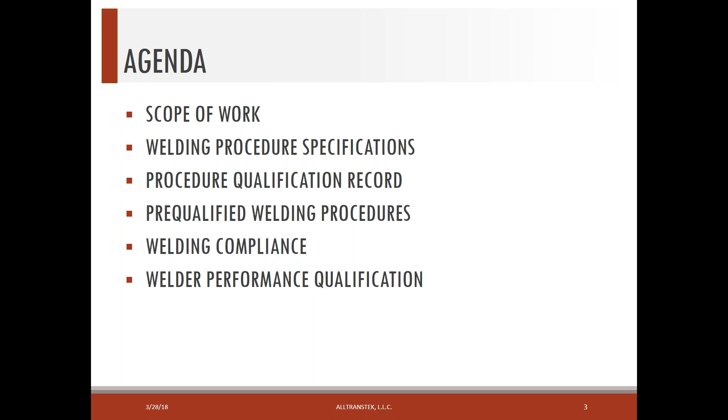So I'm going to hand it over to Mike. He's going to go through the scope of work and welding procedure section.

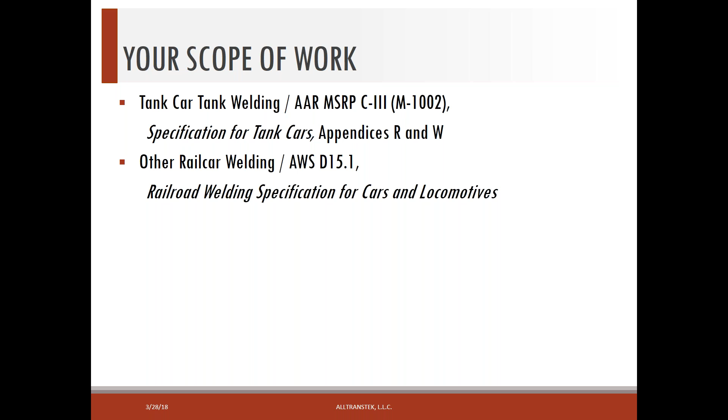Now some examples in the next few slides show welds covered under these different welding specifications. Here we see a side sheet on a hopper car, and that particular fillet weld would be covered by AWS D15.1 specification.

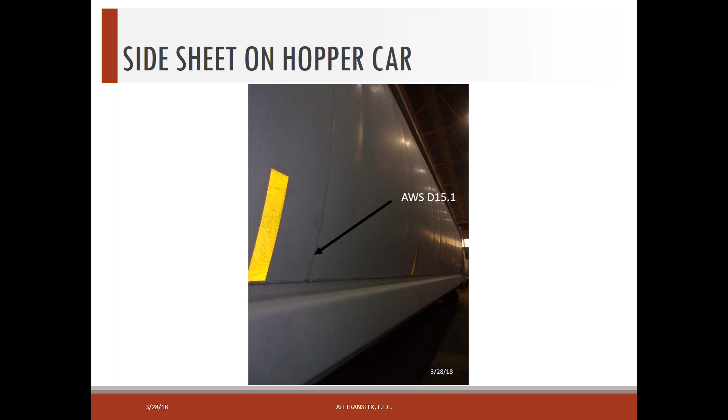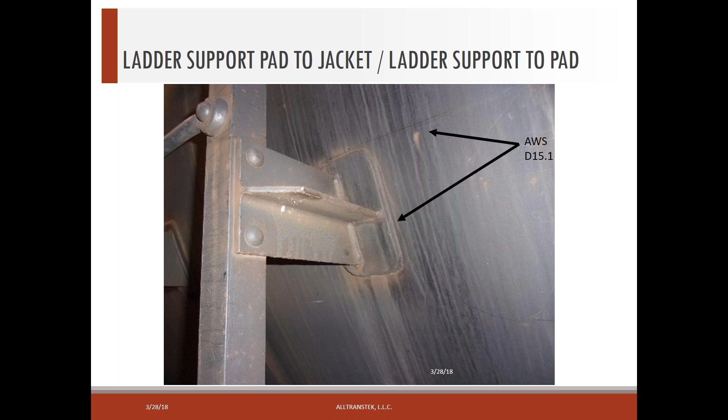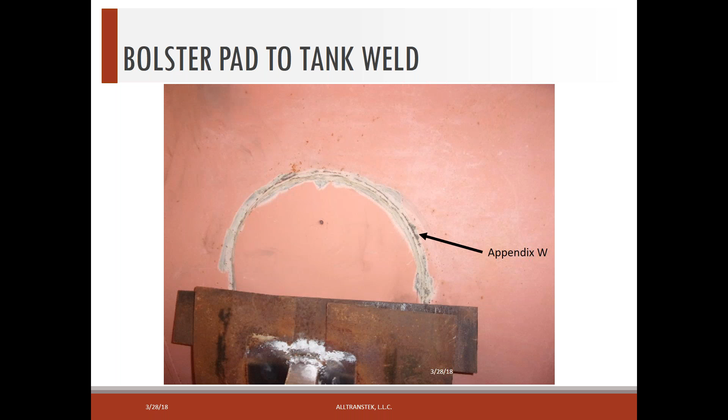This is a bolster pad to a tank. Now we're welding on the tank car tank proper, so we switch to a different welding specification—that fillet weld would be covered by Appendix W. Here we have two examples of welds of bottom reinforcing pad to the tank, and that fillet weld would be governed by Appendix W.

Then we have a portion of a draft sill transition pad welded to the reinforcing pad itself. Because it's welded not to the tank, but to the reinforcing pad, that particular weld would be covered by AWS D15.1.

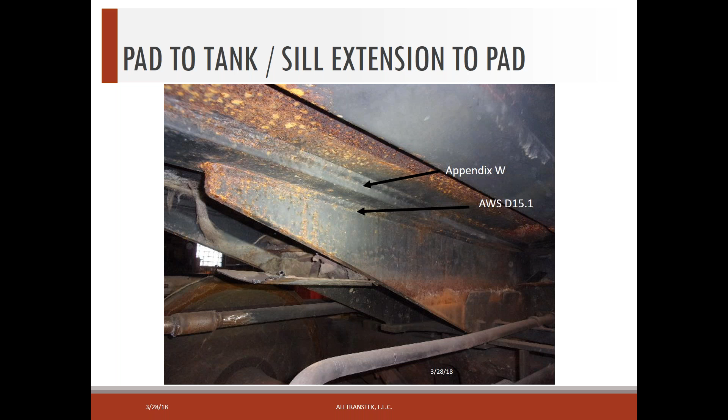Here we have a bottom valve on the tank car, and we see fillet welds there—it could be groove welds too. Groove welds and fillet welds on the steam jacket, again covered by AWS D15.1 because it's not part of the tank car tank.

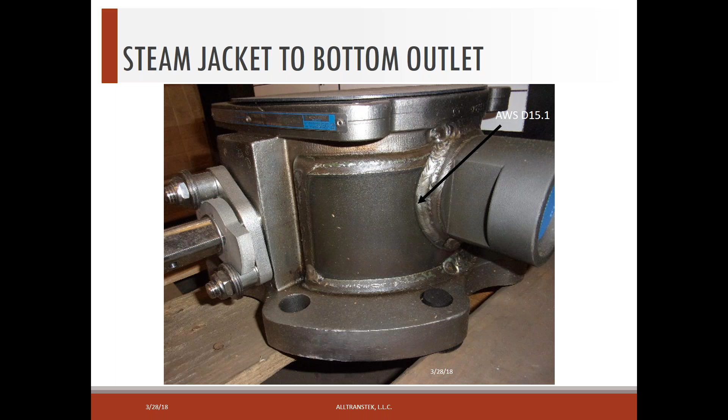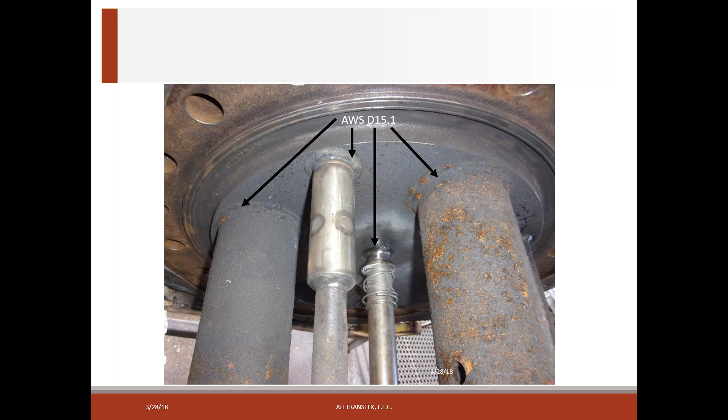Here we have a head brace reinforcing pad and the head brace itself. Because the head brace reinforcing pad is welded directly to the tank car tank, that weld is governed by Appendix W. The head brace itself, welded to the draft sill and to the reinforcing pad, since those members are not part of the tank car tank, those welds will be governed by AWS D15.1.

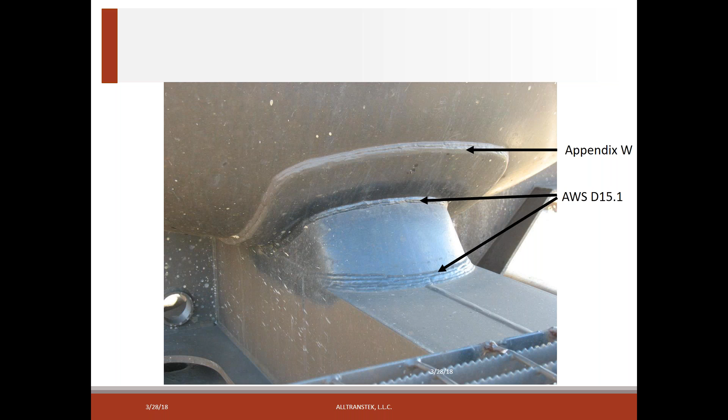Example of a flued manway. This will be a recent change here: any butt joint or any weld joint on the nozzle itself will be governed by Appendix W.

Part of the reason for that is the federal government and the Tank Car Committee have determined that because AWS D15.1 is not currently directly incorporated by reference into the federal regulations, the tank car nozzle and nozzle-to-flange welds will have to be covered by Appendix W.

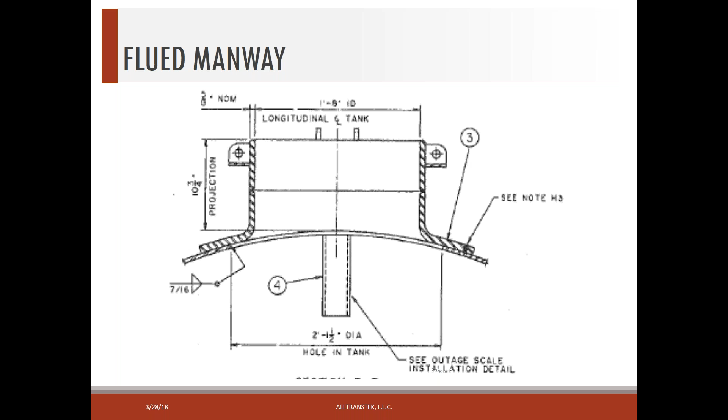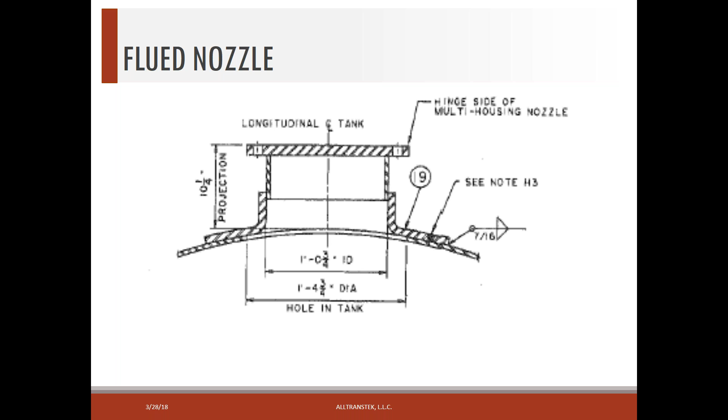The flued nozzle—instead of a groove weld here, we have a fillet weld where the nozzle is fillet welded to the flue, and probably a fillet weld where the nozzle is welded to the flange. Those welds will also be covered by Appendix W. And of course, the inserted manway, which is the groove weld into the tank shell, has always been covered by Appendix W—the nozzle to tank shell weld.

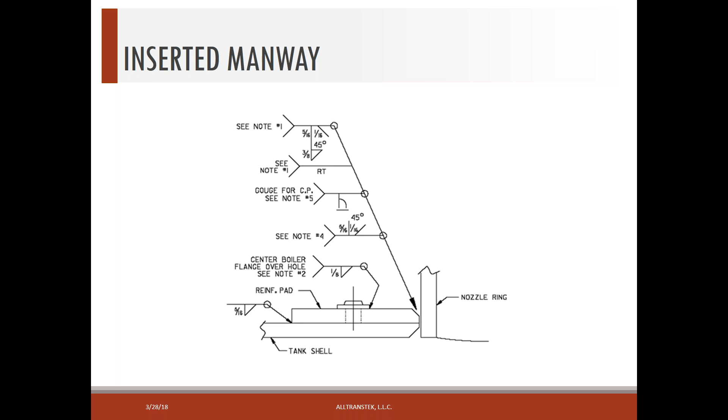Okay, again, one of the things that we have to identify under your scope of work is what material will be welded. Will it be carbon steel? Will it be stainless steel? Will it be aluminum? Of course, we could have castings, AAR M201, various grades of castings, which bottom outlet saddles and a lot of the running parts of a truck are made out of. And then, of course, the ASTM CF8M or CF3M, which is stainless steel castings. The point here, we have to clearly identify what materials are being used.

And how can we do that? Some of these materials will be identified through ASTM standards. There's Appendix M in the C3 AAR specification as a listing of materials for both tank proper, and then for other items as nozzles and flanges, and there's a pretty comprehensive list in Appendix M.

There's also a document put out by AWS. It's called the base metal grouping. The number is B2.1, and there are a whole host of materials identified: aluminum, stainless steel, carbon steel, and they're identified by M numbers and group numbers.

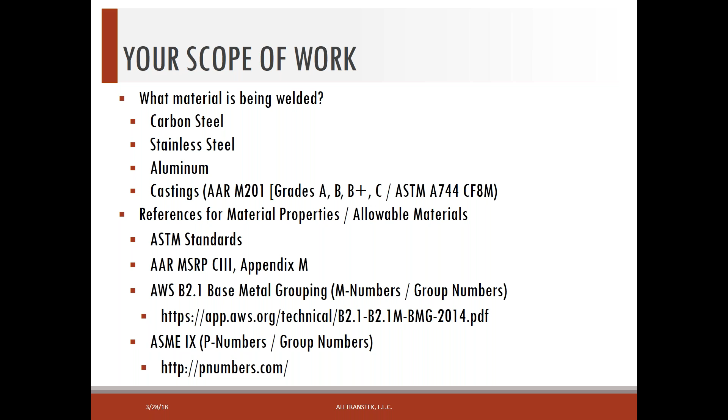Now, if I have notch toughness requirements, then I have to look at grouping. What is the group number? That further limits the use of my possible materials if I have notch toughness requirements. So clearly identifying what materials we have to weld on, we have to do that as a part of identifying the scope of work.

Okay, and the next thing would be what welding process will we use? We have 5 identified here: shielded metal arc welding, of course, flux core arc welding, gas metal arc welding. Could be any one of these 5 or all in case of maybe a major manufacturing operation might use all of these. Or if it's maybe a valve manufacturer would be using gas metal arc and gas tungsten arc welding. So we need to identify the welding process, and some things to know about particular welding processes is, say for instance, flux core welding.

Those electrodes are identified by an F number, and that particular F number is F6. So if I have a process, flux core arc welding, from the standpoint of F numbers, I can use any F6 electrode when I'm qualifying a procedure, just looking at that for an essential variable.

Under gas metal arc welding, metal core arc welding is included in that. And then for submerged arc welding, we'll have to look at the AWS flux wire classification to determine whether we have adequate tensile strength in the filler metal, if we expect it to meet the required notch toughness properties. That's the classification for the submerged arc electrodes and fluxes.

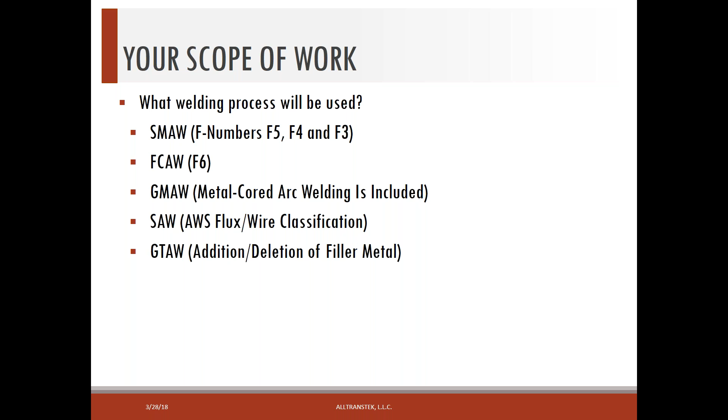And then one thing that some people have had problems with, gas tungsten arc welding, is the addition or deletion of filler metal, which is an essential variable for qualification under that welding process. In other words, if you qualify with filler metal and you try to use this as a process without filler metal, then that has to be qualified separately, because that is an essential variable.

So if we're looking at qualified procedures, if we're using Appendix W, there is no provision for pre-qualified procedures as there is with AWS D15.1 specification and other AWS specifications. So we don't have a choice. We have to qualify procedures if we're welding on tank car tanks.

If we're welding in other areas, jacket welding, structural welding, we have the possibility, and again I use the term possibility, of using a pre-qualified procedure. We have to look at all the requirements that are in D15.1 for pre-qualified procedures and make sure that we're able to use a pre-qualified procedure. And if we don't meet all those requirements that are listed, then we have no alternative but to qualify the procedure.

So once we identify whether we have to have a pre-qualified procedure, if we can use one, then we can eliminate the mechanical testing. If we can't use a pre-qualified procedure, then of course we have to first weld test coupons that will be mechanically tested, and that will lead to our procedure qualification record, the results of the mechanical tests. And once we have that, then we can establish our welding procedure specification.

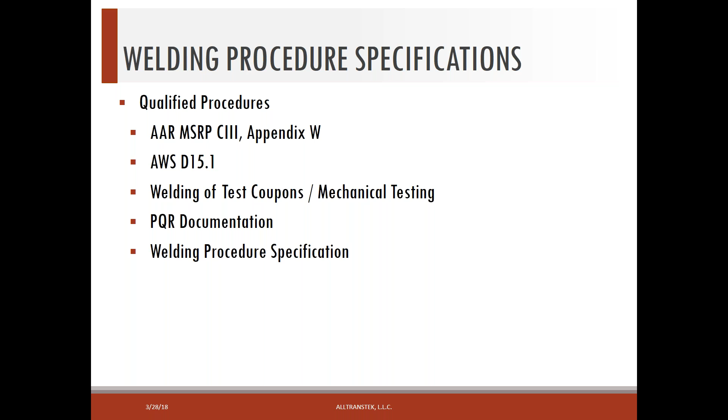Okay, for now, if we're looking at a qualified procedure, we have to answer the question, what joints need to be welded? Is it a groove weld? And if we do have to do a groove weld, or can we get by with a fillet weld? Typically, groove weld qualification will qualify fillet welds, but not vice versa.

And if we do have a groove weld, we have to ask ourselves, does that weld have to be a complete joint penetration, CJP, or are we looking at a partial joint penetration? You might ask, well, what are examples of partial joint penetration welds? In some cases, the tank nozzle to the nozzle flange in some designs is a partial penetration weld. So we have to do something a little bit different with partial penetration welds as opposed to a complete penetration weld.

And what mechanical testing is required? Of course, with groove welds, typically tensile tests and guided bend tests are required to qualify that particular joint.

If we're doing a partial penetration weld, then we're looking at doing a macro etch. Some of you may be asking, well, what is that exactly? We'll give an example in some upcoming slides. But if we do a partial penetration weld, we have to do a macro etch to show or demonstrate how much penetration we actually have in that particular joint. So if the weld procedure calls for 70% penetration, our welding symbol calls for that, then we have to establish that we actually do get 70% penetration with a particular weld.

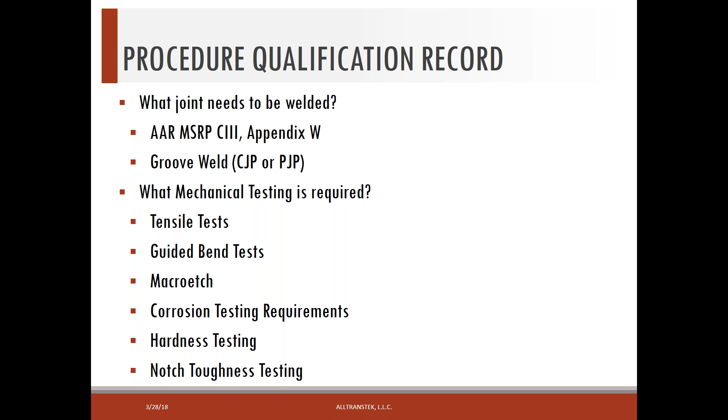Okay, here's an example or a picture on the left of a typical tensile test machine. And then on the right, we have a reduced section tensile specimen outlined. The usual requirement for a welding procedure qualification is to have two tensile tests pulled. And the weld, shown in the dark area on the right side of the drawing, you can see how that specimen is reduced in the center.

And the reason for doing that is we want it to fail preferentially in that area. We don't want it to fail somewhere outside of that area. So the tensile strength would have to be at least that of the base metal. That's a requirement for the reduced section tensile.

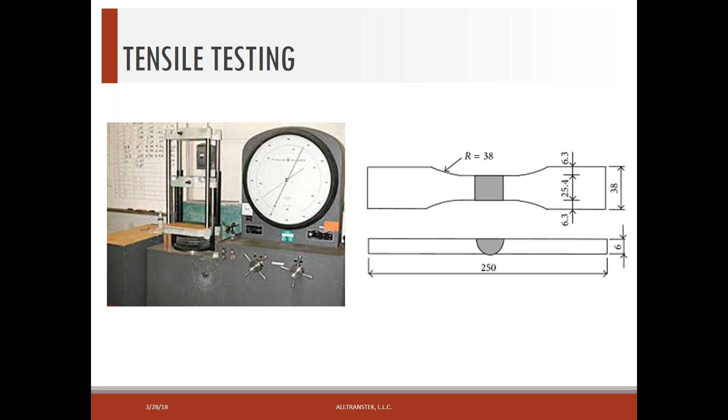Another requirement mostly for groove weld procedures is guided bend tests, and most of the time 4 side bends are required, or 2 face bends and 2 root bends are required on thinner material. As an example, if I'm going to weld a 1/4 inch thick material, I probably would not cut a side bend specimen from that for procedure qualification. I would bend the face of the weld and the root of the weld instead, 2 face bends and 2 root bends instead of 4 side bends.

A point about the plunger: the rounded part that pushes down on the bend specimen has different diameters for different types of material. If we're welding high strength material, or higher strength aluminums, the diameter of that plunger will increase, because if we try to bend it at too sharp a radius, it will fracture just due to the material properties. So that plunger diameter is not always the same. If you're welding higher strength materials or certain aluminum alloys, you need to check what plunger diameter is required, and typically if you're sending specimens out to a lab for testing, they will handle that as long as they know what the material is.

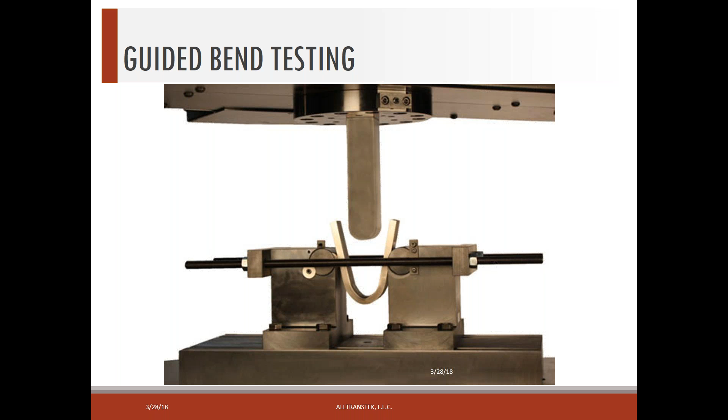We mentioned macro etch earlier. This is an example of a full penetration weld into a backing, not a partial pen weld, and this is the macro etch. There are some small dots in 3 areas on that specimen, down toward the bottom. You can see it in the heat affected zone and across the weld, through the middle of the weld, and also close to the surface of the weld. Those are micro hardness readings taken by the test lab, an example of what that would look like in cross section.

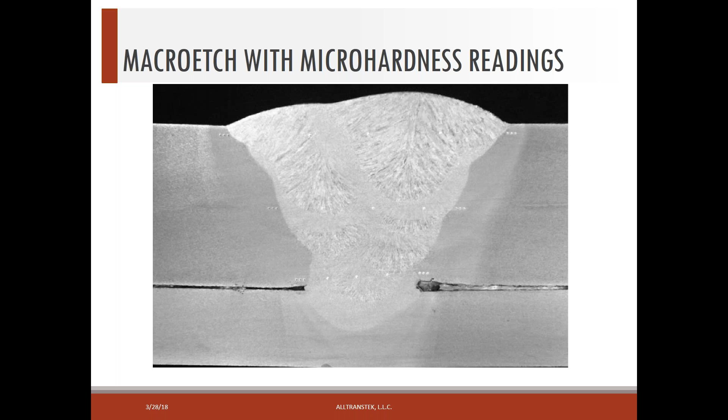This is a similar macro etch, but this weld is a double weld, not welded from one side. You can see multiple passes of the weld made from one side, and then multiple passes on the other side. You can also see the little white indentations, which are micro hardness tests in the weld metal and heat affected zone. So this is what a macro etch would look like.

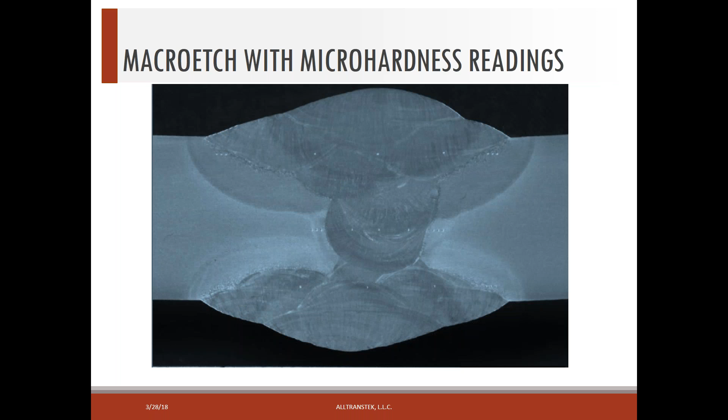We mentioned the requirement for notch toughness testing. This isn't the only way to test it, but the typical method is the Charpy V-notch test. At the upper left corner you see the actual impact testing setup, and to the right you see what's called a hammer, brought up into the loaded position. That hammer is released and strikes the impact specimen with a certain force. The force it takes to break that Charpy specimen is measured in foot-pounds, and the more foot-pounds required during a break test, the more impact resistance we have.

In the upper right corner you see the typical Charpy specimen, usually a little over 3/8 of an inch square - the typical dimension is 0.394 by 0.394. The notch itself, seen in the upper view, is machined to very precise specifications. That's the notch initiation point for the fracture of a Charpy specimen, and then we measure the foot-pounds to see how much energy is required to break it.

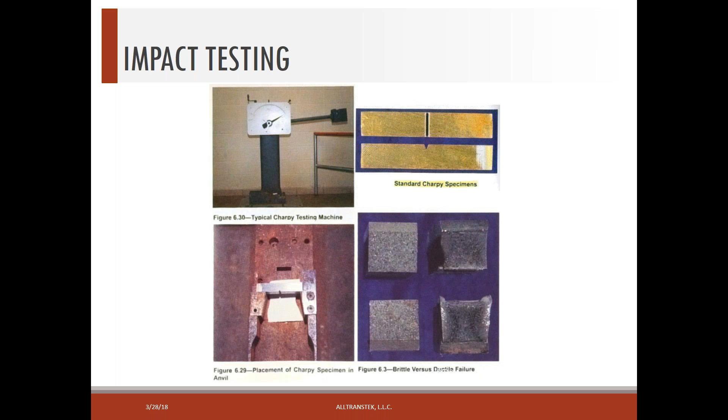Okay, so after we've welded the coupon and tested it, now we have to put together our procedure qualification records.

Usually welding position only comes into play when we have notch toughness requirements. If I don't have any notch toughness requirements specified, if I weld that coupon in the overhead position, the down flat position, or the horizontal position, it doesn't really matter. The side bends or the tensile test will not really be affected adversely by one position or the other.

However, if I'm going to weld a test coupon and I do have notch toughness properties specified, then typically most codes say that if I weld that coupon in the vertical up position, that's the most severe case for notch toughness. Why is that? Because that's the most heat input, the slowest travel speed, and the most severe condition that we would see in a production environment.

So if I qualify in the 3G up position with notch toughness requirements, then I can weld in any position per the procedure, simply because heat input has an adverse effect generally on notch toughness properties.

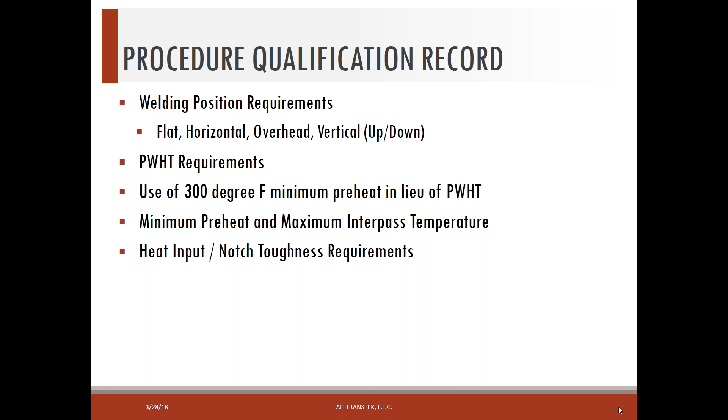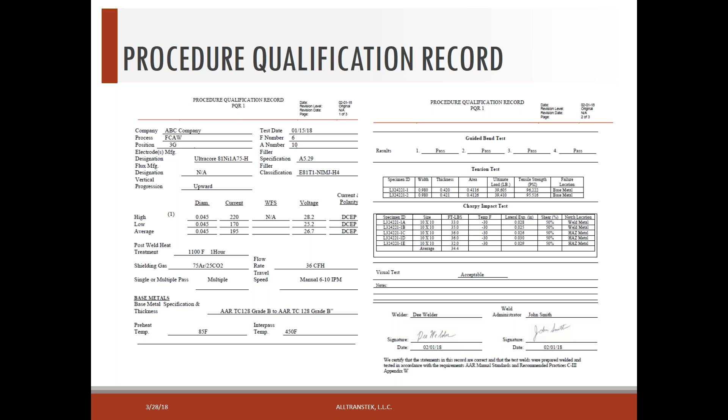Okay, welding procedures. Now we've got a PQR established and we have to do a welding procedure, we have to list all the essential variables, and these are some examples: wire feed speed, your electrode specification, the base metal limitations, and that gets back to M numbers, P numbers, and group numbers, what kinds of joints will be used, amperage and voltage, specified as a range, and travel speed also.

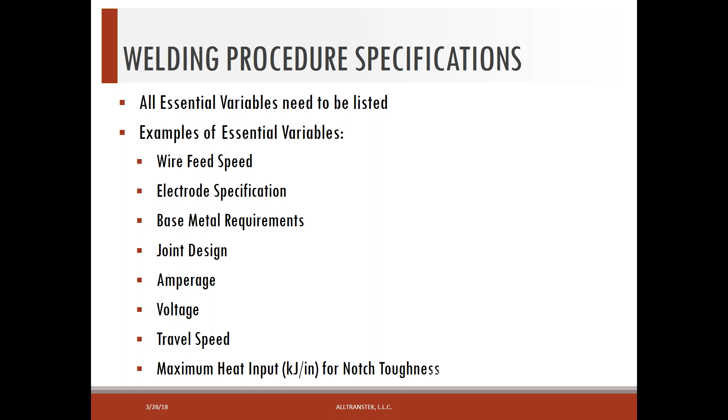And then for notch toughness, what was the maximum heat input that was used to qualify the procedure.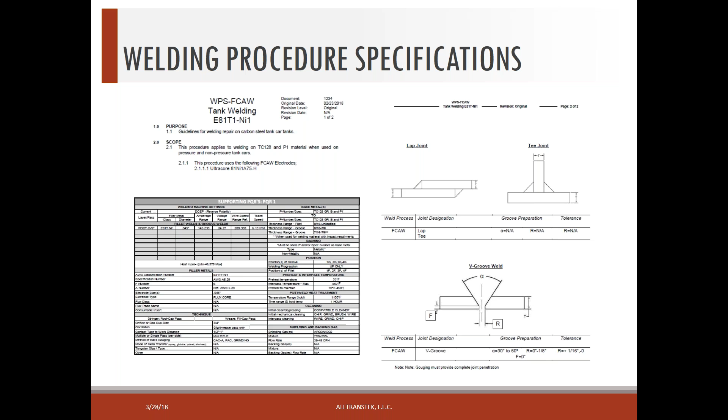An example of a welding procedure specification, and this would again have more of the ranges, allowable ranges of materials and amperage, voltage, travel speed, joint designs. This is just an example. They can follow many different formats as long as all the required information is put down in the procedure specification.

Okay, that's pre-qualified welding procedure. This is where we can't just say that I have D15-1 in my bookcase and therefore I have a pre-qualified welding procedure. That's not allowed. We still have to qualify or have documentation for the pre-qualified procedure.

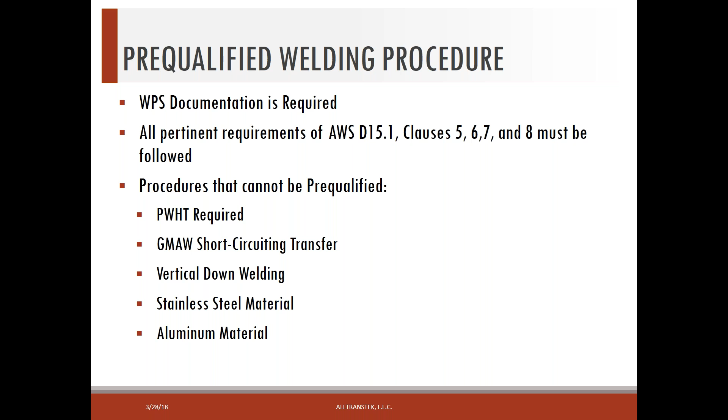And we have to meet all the pertinent requirements of AWS D15-1, that's clauses 5, 6, 7, and 8. Some procedures that cannot be pre-qualified: if we're going to have post-weld heat treat, if we have gas metal arc welding with a short circuiting transfer, if we're welding vertical down, that's not allowed to be pre-qualified. And in D15-1, stainless steel material and aluminum material cannot be pre-qualified. We have to develop a qualified welding procedure for those materials.

Okay, here's an example of a pre-qualified welding procedure, and there are pre-qualified joints listed in AWS D15-1. Other AWS codes that recognize pre-qualified joints will have those joints listed there as well. But those joints are very conservative, and as long as you comply with the joints listed in D15-1, you can use that pre-qualified welding procedure.

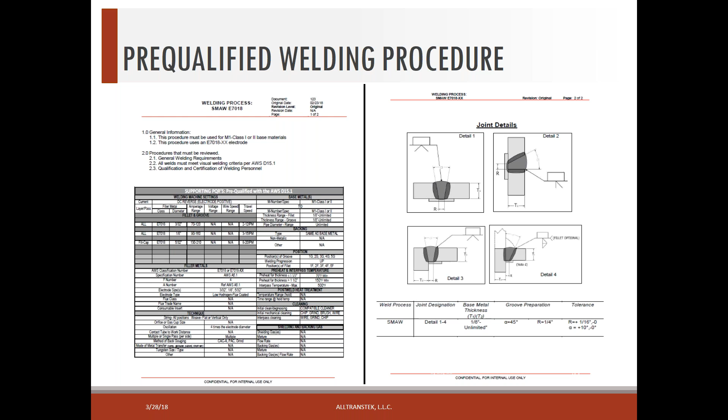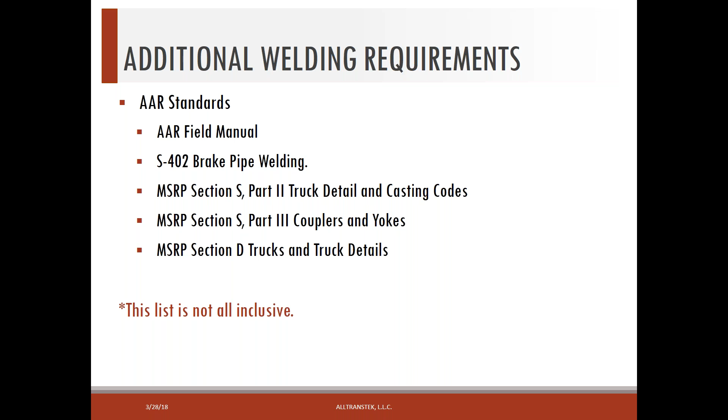We do have to look in some other standards for welding requirements. Everything is not nailed down in D15-1 or Appendix W. Sometimes we have to look at the field manual for ways to repair a draft sill, S402 for brake pipe welding. There are some requirements in there that are a little more stringent than D15-1. And then, of course, some of the AAR standards with couplers, yokes, and truck details have certain specifications on what can be welded where and how much buildup can be put down. Again, this list is not all inclusive, but this is just to point out that we have to look in other AAR specifications, sometimes in the federal regulations too, if we have particular low temperature commodities - 179.102, I believe it is - that gives us some additional Charpy notch toughness requirements for a welding procedure. So there are other sources that we have to check out if we're going to qualify a welding procedure.

Okay, so once welding compliance - Mike's gone over a bunch of stuff with welding procedures, whether you're Appendix W, D15-1, and then additional requirements. So at that point, the welder's completed a coupon, so basically you'd have somebody at your company weld a test coupon, and you do all the testing. So technically at that point, you really only have that person certified. Nobody else really at your facility can weld. He can only really weld within the position that he welded.

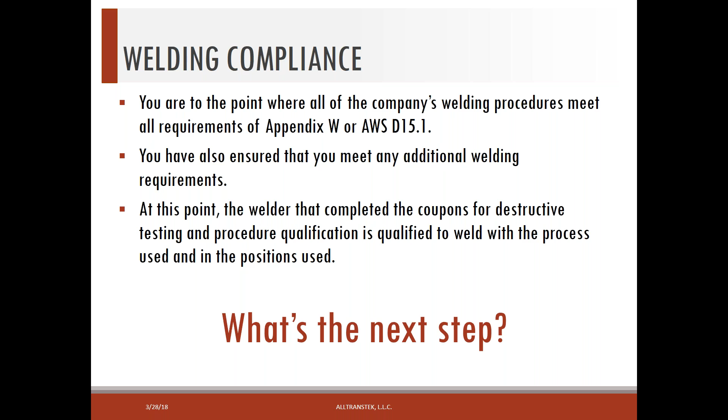So as Mike said, some welding procedures we can qualify flat, so this welder would only be able to weld with that procedure in the flat position. And remember, procedure qualification is a starting point. Welder qualification or welder certification is ongoing. You'll spend time developing a welding procedure, but once that's in place, the bulk of your time is going to be spent certifying and qualifying welders to make sure they're compliant to weld with those procedures. So welders cannot be pre-qualified. And also, a welder that's been certified at one facility cannot be transferred to another facility.

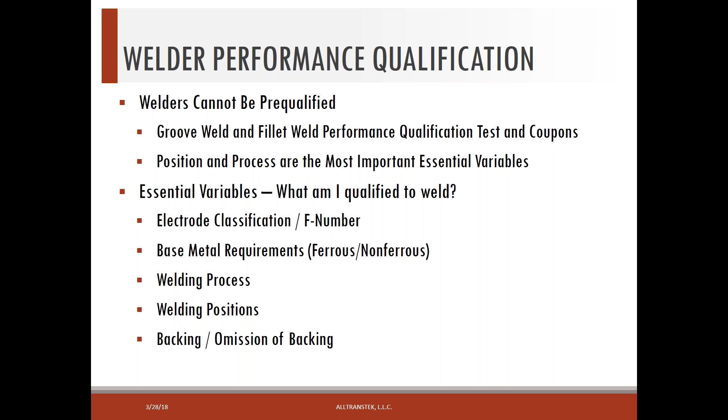The next question we have to determine is, are we going to do a groove weld or fillet weld performance qualification test? And then the position becomes very important - what position they're going to weld with and what process, like Mike talked about earlier, the different welding processes. I have a slide that talks a little bit about that. Then we get into the essential variables - what am I qualified to weld? So you can give a welder a test, but what does that test really cover? We need to know what F number they're certified to, what the base metal was - ferrous, non-ferrous - what welding process, as we get into gas metal arc, shielded metal arc, flux core - I have some slides on that - what position, and whether they welded with a backing or the omission of a backing.

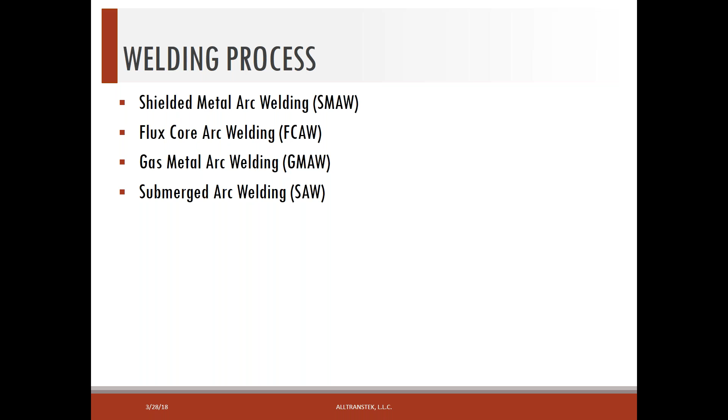And Mike also listed gas tungsten arc. This one I just listed the 4 major ones. Like I said, gas tungsten arc is used in our industry, but the bulk of tanks are welded with these 4. So just to show you real quick, shielded metal arc welding - that's what's commonly called stick welding.

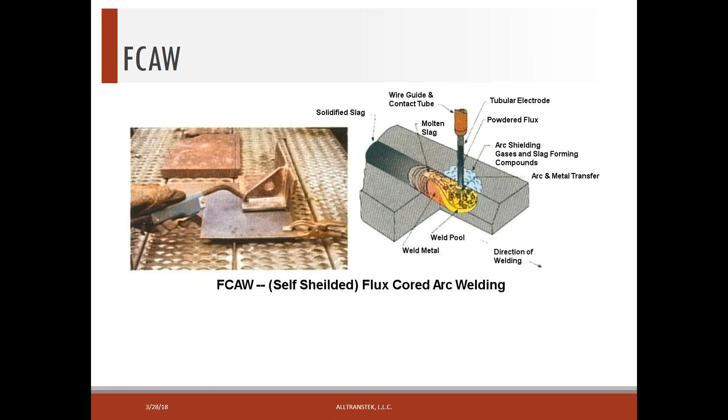Then you get into flux core arc welding. It can either be a dual shielded process, where I have an external shielding and an internal flux within the wire, or it can be self-shielded flux core, where it has no external shielding gas.

And then we can have gas metal arc. Gas metal arc is typically what we used to call MIG welding. This is what gas metal arc is - it's basically a gas that does all the shielding, and then it's a solid bare wire.

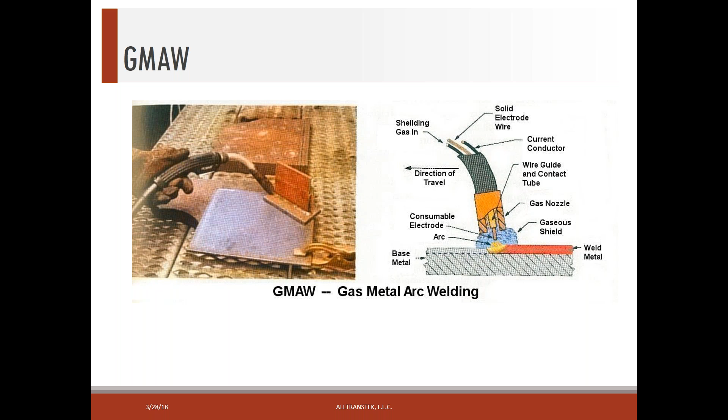And then we have submerged arc welding. If you've ever seen a tank car, all the big girth seams that are welded are welded with submerged arc welding. That's where we have a granular flux - that's where all the welding takes place. You don't need a welding helmet. It's all done underneath a granular flux.

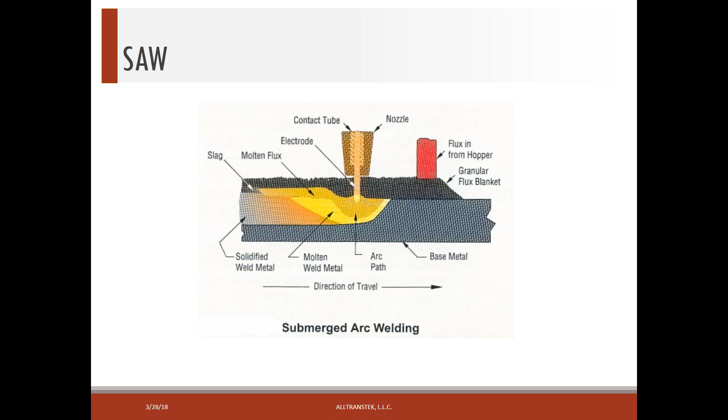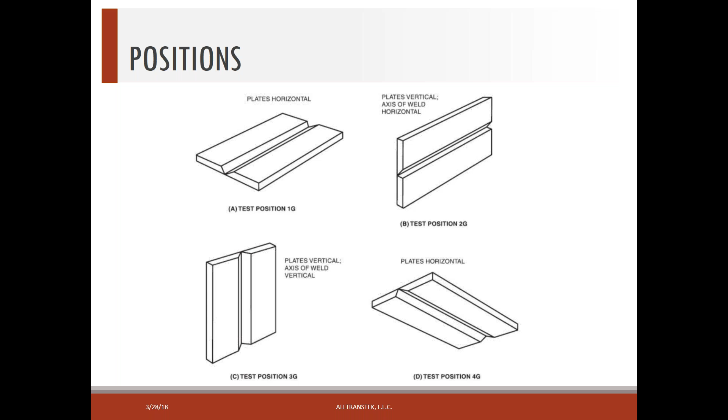My process is very important, and my position becomes very important. Positions, AWS D1.1, they keep it the same within the industry, based on position: 1G, 2G, 3G, and 4G. 1G is basically flat, 2G is the plate horizontal or the welding progression horizontal, 3G is vertical up, and 4G would be overhead.

The same process goes for fillet welding. 1F would be a truly flat weld, 2F would be horizontal, 3F would be vertical up, and 4F would be overhead.

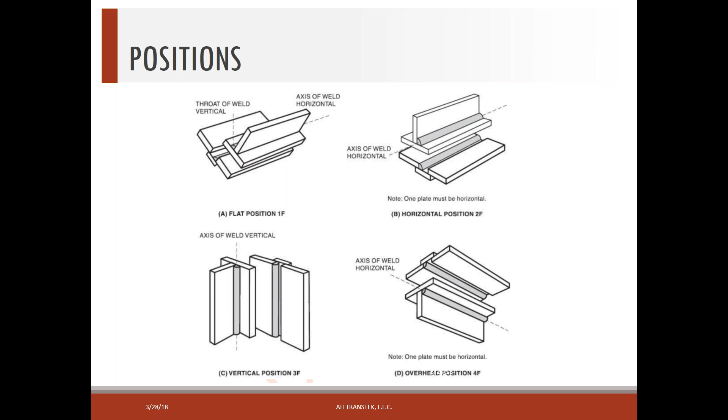Then we get into pipe certification. In some cases they transition across, but in most cases pipe welding, anything under 24-inch diameter, would fall under pipe. So we get into 1F, which is a rotated pipe, the pipe is actually rotating, and your welding only takes place in the flat position on top. 2F would be the plate flat, pipe on top, and 4F would be overhead, welding overhead the plate, or it could be a socket weld.

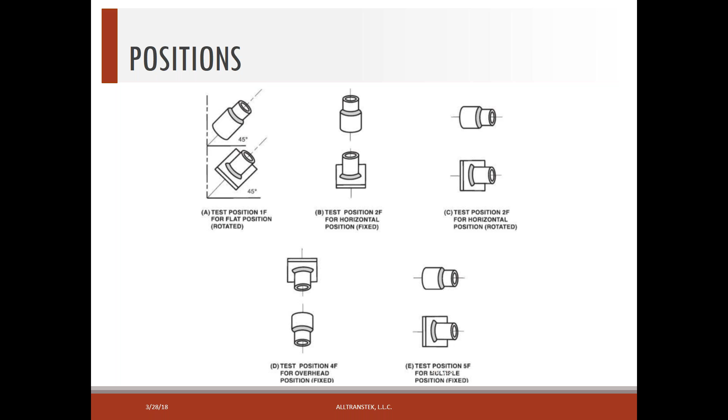5F would be the plate basically vertical, the pipe coming in horizontal, in a fixed position, so you're welding around. I have some pictures to show you. The 6G pipe test would be where the pipe is at 45 degrees on the bottom, and again the pipe is fixed, you're rotating around.

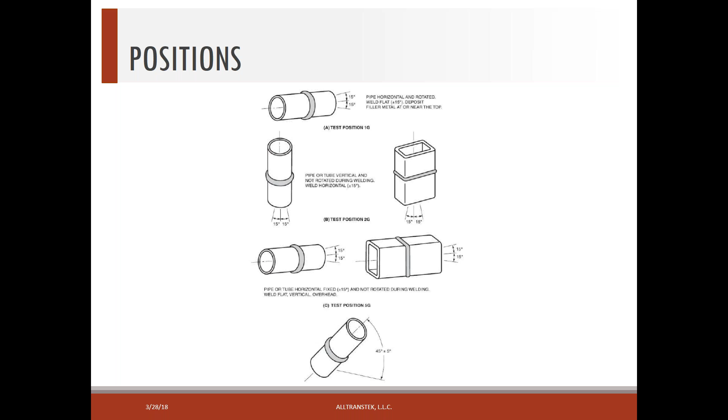The 5G would be the one above, where the pipe is horizontal, and the progression could be up or down. 2G would be the pipe vertical, welding basically in the horizontal position. And the 1G at the top would be rotated, where the pipe is actually rotated.

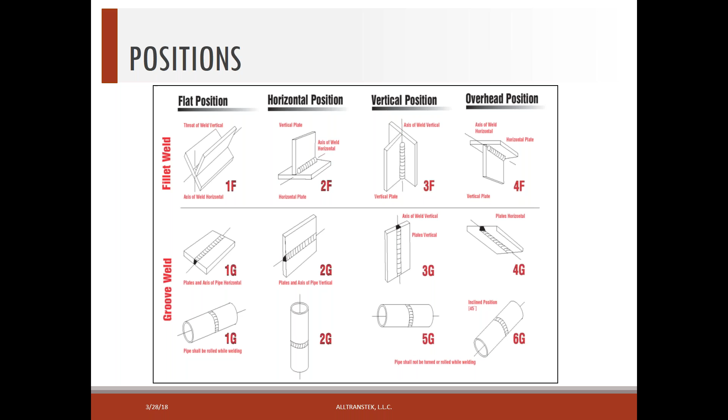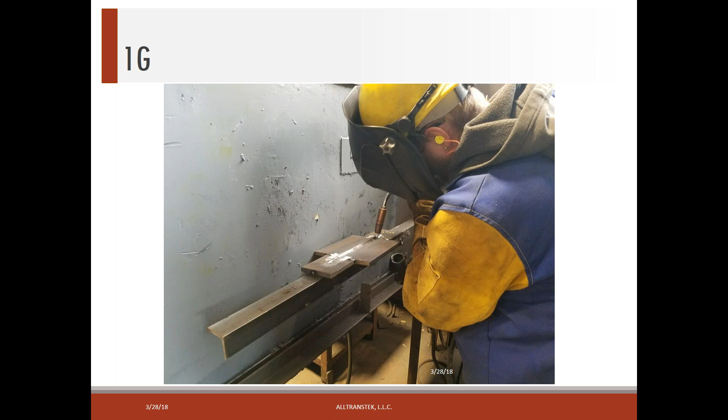It's kind of easy to see these in slides, but what I thought would be good is to actually see a welder welding. So this is one of the guys at one of the shops actually taking a flat test, welding with flux core. The plate is truly flat, so that would be a 1G test.

Then this would be what we'd call 2G. He's in the horizontal position, welding in the horizontal plane. In this scenario he's showing you can either push or pull the arc. That's going to change the penetration, but that really gets into technique.

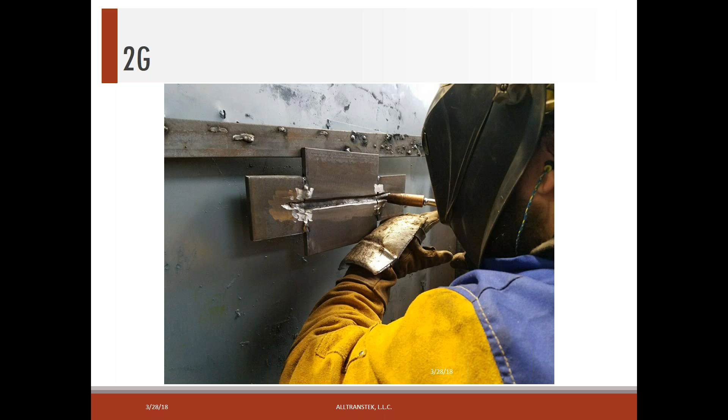Then 3G would be vertical up, so that's the welder starting at the bottom. Now you could weld vertical up or vertical down. Anytime you get into thicker, heavier construction material, you're going to weld vertical up. Vertical down does not give you as much penetration.

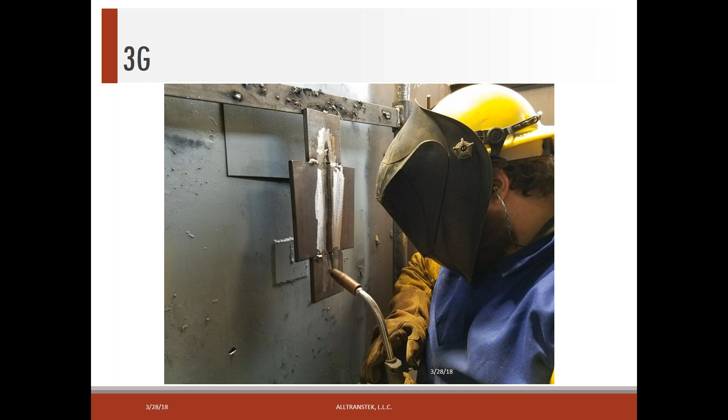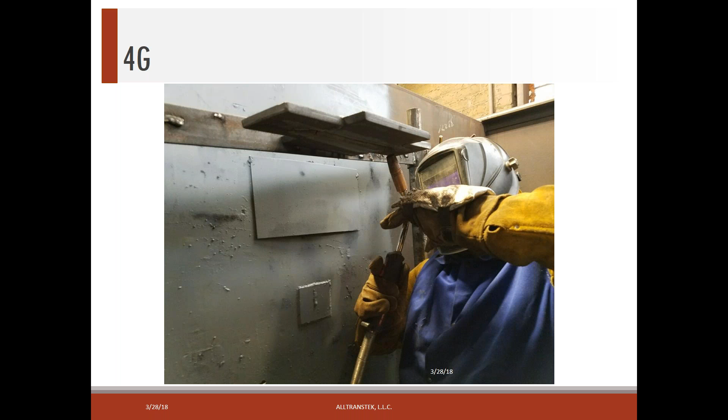Then this would actually be the 4G, the overhead. The guy is actually welding across overhead, trying to follow where he's going. Again, all these are the different tests that we give. Any welder coming into the shop would have to take tests similar to this, and you could also give him fillet tests depending on what he's welding.

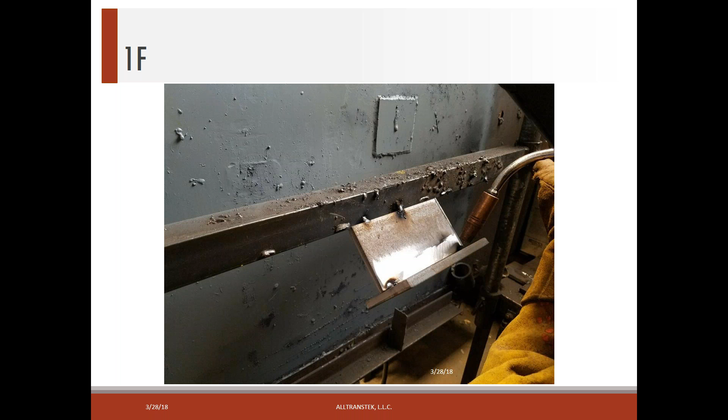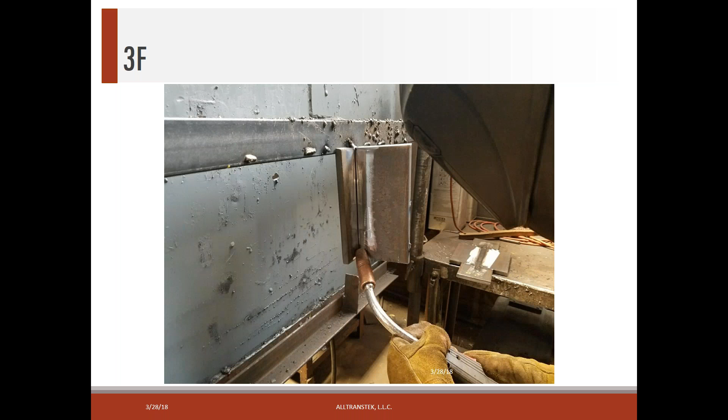A 1F is truly flat, where gravity isn't pulling down to one plate or the other, so you're really welding in a V. That's what we call the 2F, welding horizontal. That would be 3F, which would be vertical, and then 4F, welding overhead.

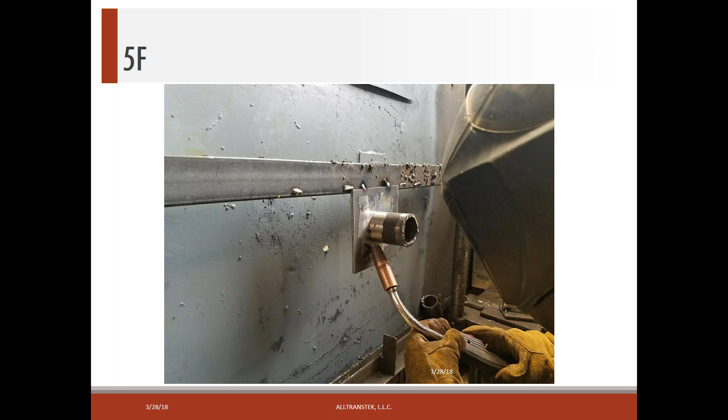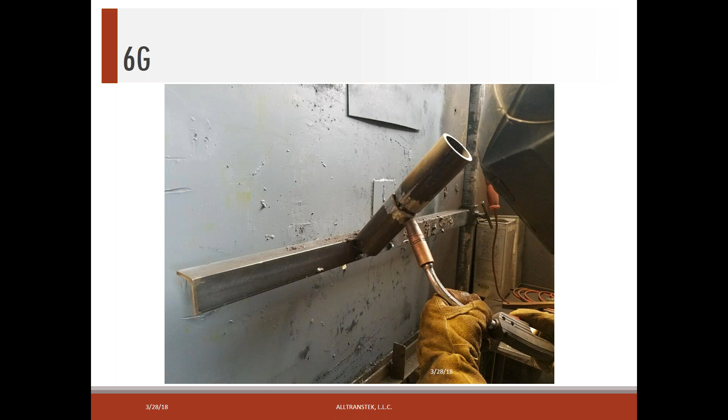So when you go into any of the codes, they're going to list each position that you take, which we just talked about, and they're going to show you an associated position that you're qualified in. So if you take a 1G test, you're going to be qualified for flat, which would be 1G. Appendix W lists a little bit different than D15-1, but the F under groove would be 1G, and then the F under fillet would be 1F.

So, if you ask the question, well, why is it customary to give a welder a 2G, 3G, 4G test? Because if we test him in all positions, then we're really not worried about what position he welds in. He's qualified to weld all grooves. And in this scenario, he's qualified to weld in all true fillet joints. And this table is taken, this Table W.2 out of Appendix W.

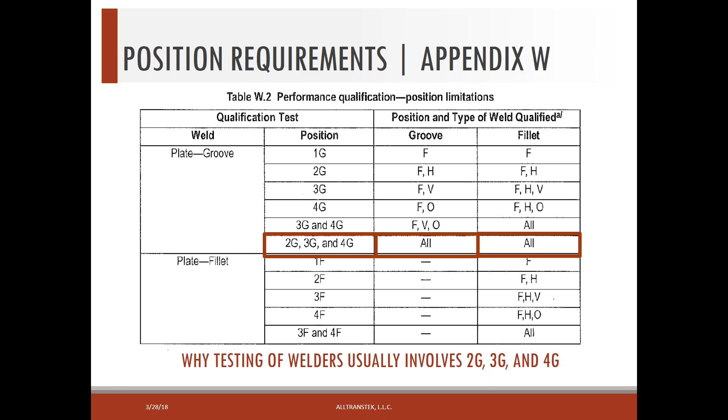And we list this now because pipe nozzles right now, even though there are nozzles on a tank car, like Mike said, the nozzle is part of the tank, but Appendix W doesn't have pipe welding requirements in it right now. That's all been put together by the task force. It's been submitted to the tank car committee. So right now we're waiting for that to get approved, but eventually all the pipe welding requirements that's in D15-1, very similar, would be transitioned across to Appendix W.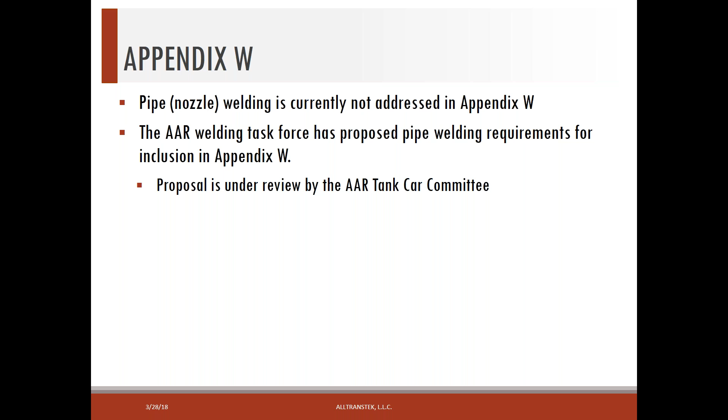And then this is right out of AWS D15.1, very similar table, but as you can see, the bottom sections get into all the pipe welding requirements. And again, that eventually will be in Appendix W once it gets approved.

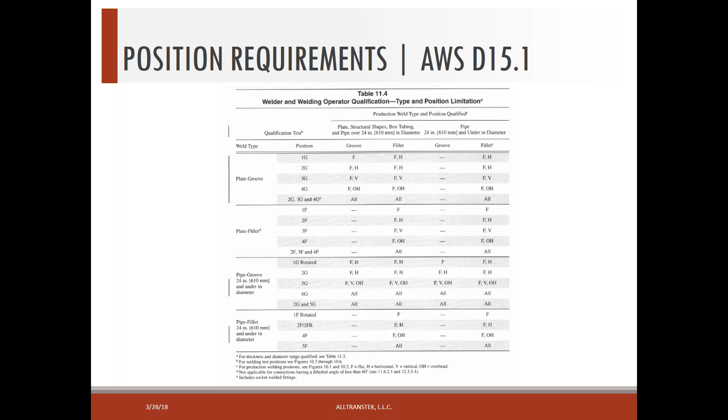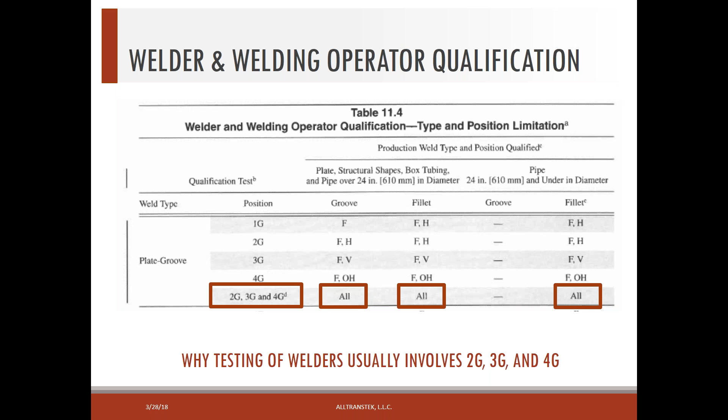And just to kind of zoom in on the plate test, so we take a 2G, 3G, 4G test. We have all for grooves, all for fillets. And then it also gives us all fillets on pipes. So that's in the code right now that you're allowed, as long as you take a 2G, 3G, 4G, you'd be qualified to weld, similar socket welds on brakes for on different parts.

So I'm not going to really get into this, but this is kind of, if you go into either one of the codes, they're going to show you this table, and this is the position requirements. So if I give a welder just a 1G test, then I have to worry about going back to this section and going to flat up around the top, and then I would have to say, okay, well, if I incline more than 15 degrees, now I'm considered vertical, and then they have the rotational axis.

And I like putting this in to show people because it really is kind of confusing. And this is if you sit down and break it out, you could figure it out. But this is exactly the reason that it's very customary to give a welder a 3-position test. This table goes away. I don't have to worry about it anymore because now my welders are certified in all positions, and I don't have to worry about my position limitation.

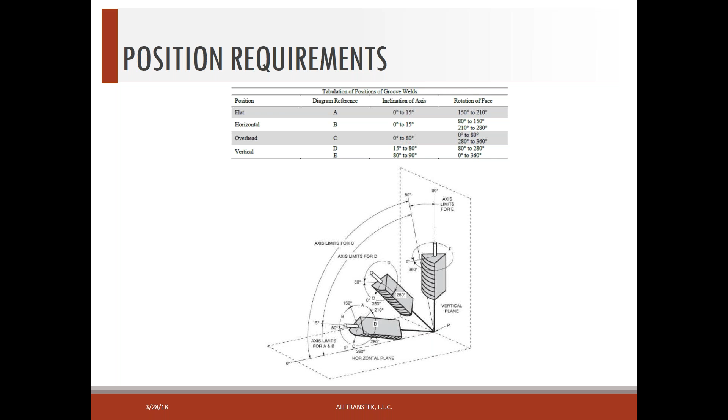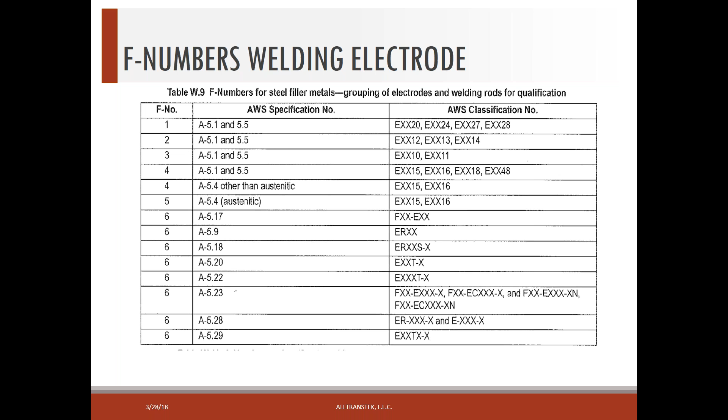Similar with F numbers, Mike talked about F numbers earlier. This is kind of the table that breaks down what the different F numbers are. And so like a 4F number would be, if you look at the section, a very common electrode we use is like 7018, which would be a 4F. And this just breaks out the different F numbers, and the next slides will show you a little bit better.

So like 7018, which is a shielded metal arc, so like stick welding process. So the 70 is 70,000 tensile, 1's all position, 8 is low hydrogen. That would be an F4 filler metal. And then like 309L, which is commonly used to weld carbon to stainless, it's an F5 filler metal. So if I qualify my welder on carbon steel 7018, he's not qualified to weld 309 because the F number is higher.

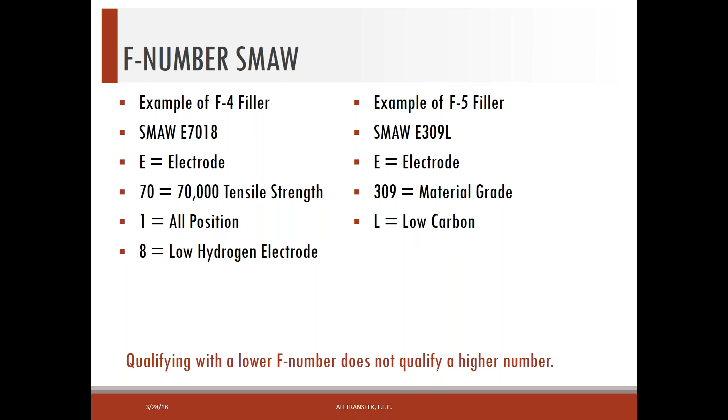Which is kind of the exact opposite if I go to flux core, because flux core is an F6 filler metal, even if it's FCAW E71T1. So 7 is 70,000 tensile, 1's all position, and a tubular electrode, and it's an F6. And then if I take a weld test on E71T1, since 309L, which is again what you use it commonly for welding stainless to carbon, or if you use 308LT1, it's an F6. So you don't have to qualify welders on stainless with as long as the F number is the same.

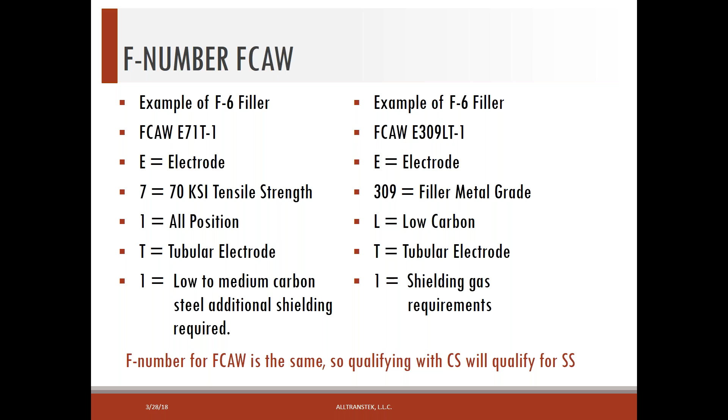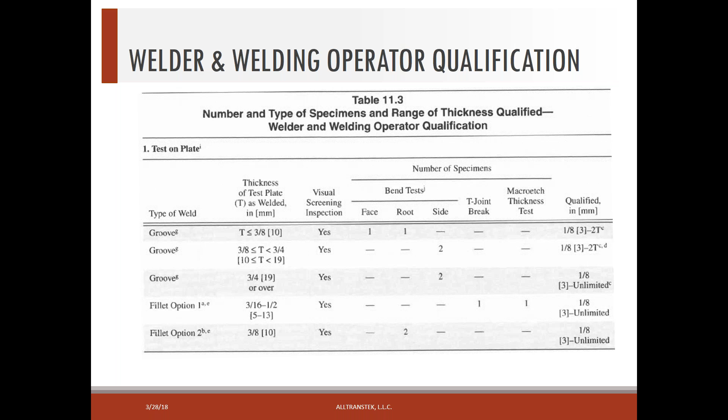So in welding operator qualification, we showed you some tests earlier. This is just breaking out the different tests a welder would have to take: face bends, root bends, or if I'm going to do 2 side bends.

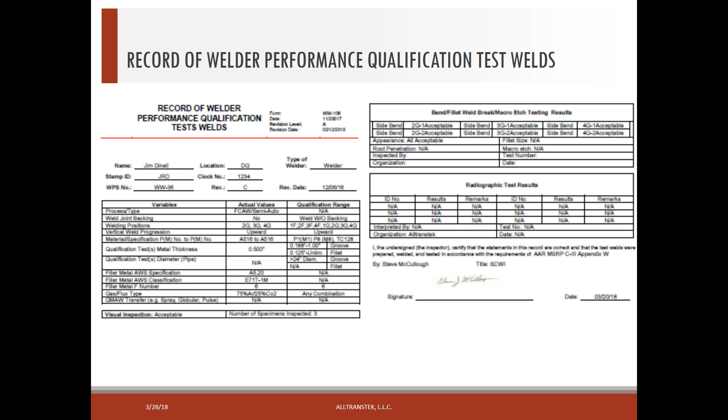And then, period of effectiveness. So if I test a welder, how long is he certified? You're basically certified indefinitely as long as 2 criteria are met: he has to use a welding process within a 6-month period, and it has to be documented, and there's no specific reason to question his ability. If he's putting down good welds, his welds should be inspected every day, so if they're being inspected, there's no reason to question. The 6 months applies to each process, so if he welds with stick or SMAW, that covers him for that, but he also has to weld flux core or gas metal arc weld separately.

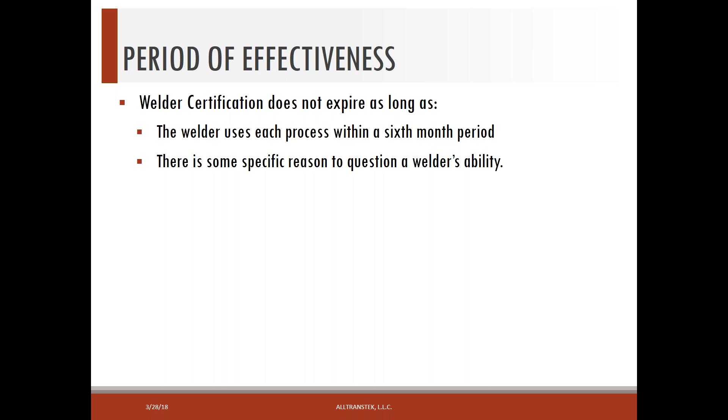So that's basically the end of our presentation. We can open it up to some questions.